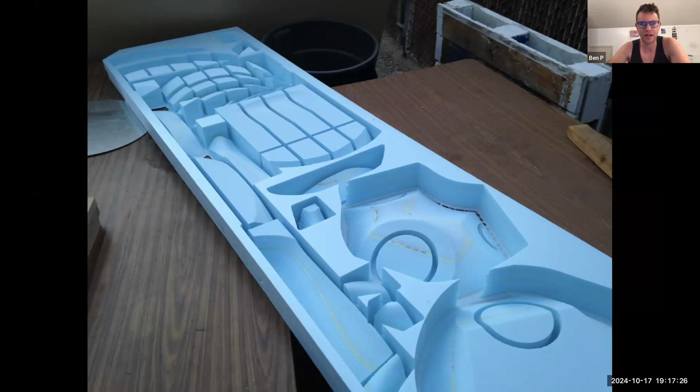So back to the second egg chair. I knew I wanted greater precision, elegance, etc. So I made the whole thing out of CNC milled foam. I didn't have a robot arm, and the final surface was very complex, so I sliced it into these 3-inch modules and had a waffle grid made out of wood. I put the little modules in the wood, then gallons of putty spackle on it. Then I put 2 layers of fiberglass on top and 1 layer on the bottom, and a tremendous amount of Bondo on it. The process still required an unbelievable amount of dumb labor.

But there was unquestionably greater precision involved here. So here we see the construction of the thing with this wooden core, and then this foam shell - well, now foam and fiberglass. And with the addition of these nodes, which were also CNC cut, the whole thing came together.

My thought with this lecture was that I would try and show photos of how I make things, so as to demystify the process. But then I want to encourage people who just graduated or are about to graduate to consider a more DIY approach to architecture.

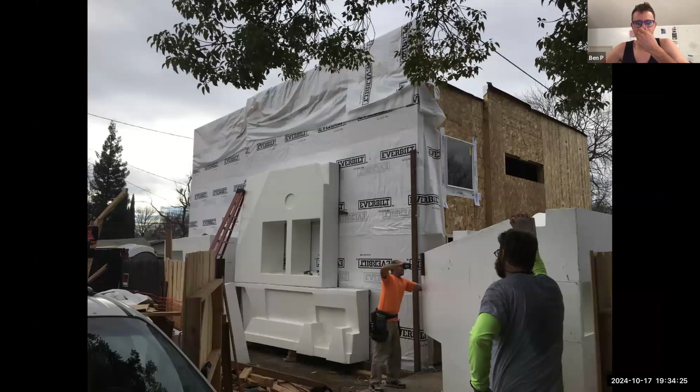Here's more or less a week of assembly. I had at this point sold my car, my truck, because I didn't need it anymore. So I took a train, and I slept in this house for a week, kind of bathing in the bathroom of a Starbucks, essentially - meaning brushing my teeth, then sleeping in a sleeping bag. It was winter, and California is very mild, but even winters can be pretty chilly at night. Anyways, I slept in this house for about a week while this was getting constructed.

All of these panels we were able to lift ourselves with ropes and proverbial manpower. But this panel and the one beside it needed to be lifted with an actual crane. The crane guy charged us something like $300 an hour, but he showed up, set up his crane, and craned these two in place in about 20 minutes. I don't remember if he prorated us for the hour, but he was in and out.

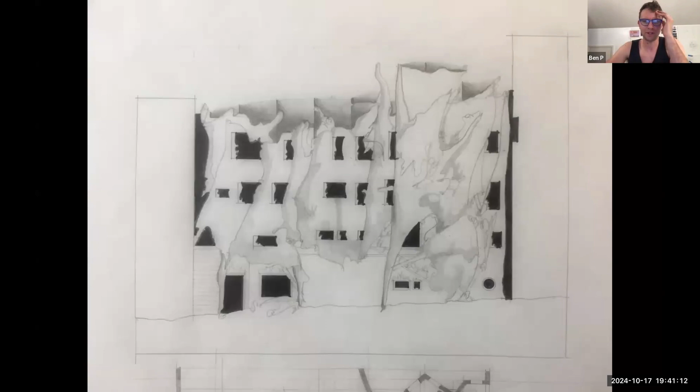I never built it, but I'm going to go through a few of the process images that I like. This is one of these earlier instances of a series of undulating volumes or bay windows lapped on top of each other. Why it looks like this, I couldn't exactly say—it looks like a series of bags.

I thought this was kind of a breakthrough. I couldn't exactly tell you why, but I just had a very wonderful, tingly feeling about it. I loved this gesture of an arch and then an inverted arch on top of it, and then this pinching gesture. Everything else was kind of fluff, but I loved this central gesture.

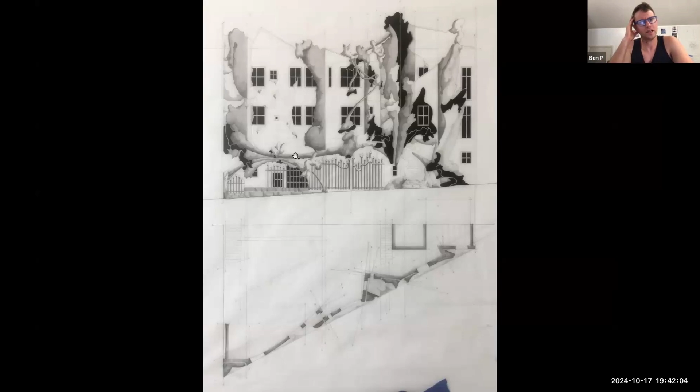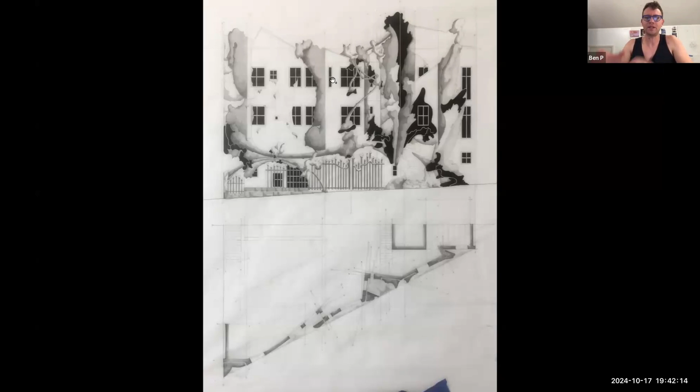So that blossomed into this drawing that you see here, which defines this idea I explained earlier about relatively simple projecting vertical masses, which are then adorned on the edges.

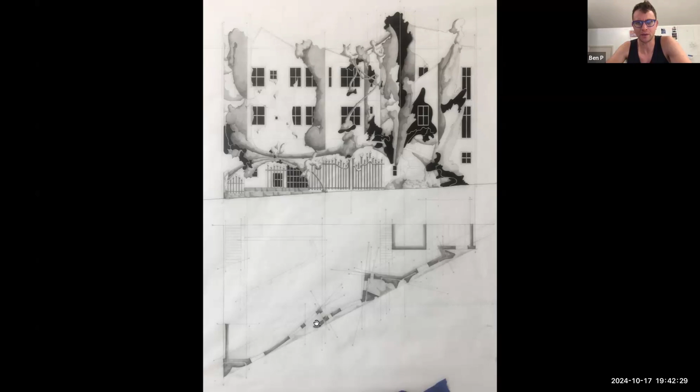Here you can see those projections with these tiny little sculptural appliques happening on the bottom. Here's that detail that I really like. This was a slightly more fine-grained version of that same drawing.

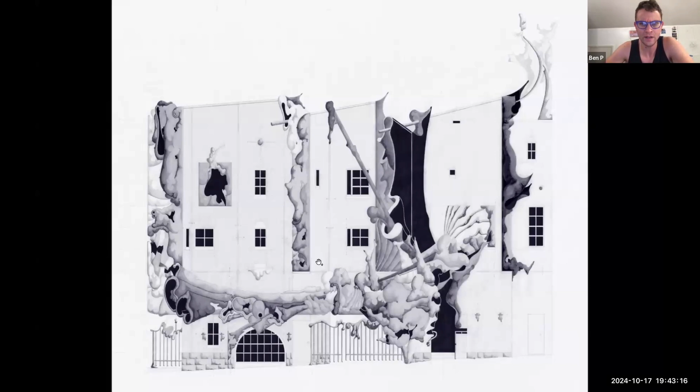But sometimes I get lost in the excess and virtuosity of a drawing, and you can very easily lose sight of the whole. By the way, what exactly is all this stuff? It's clearly eyes and mouths and orifices. Why exactly it is that way, I couldn't exactly say, but why is Gaudi the way that it is? I couldn't say either. So I figure if Gaudi could do it, I could do it as well.

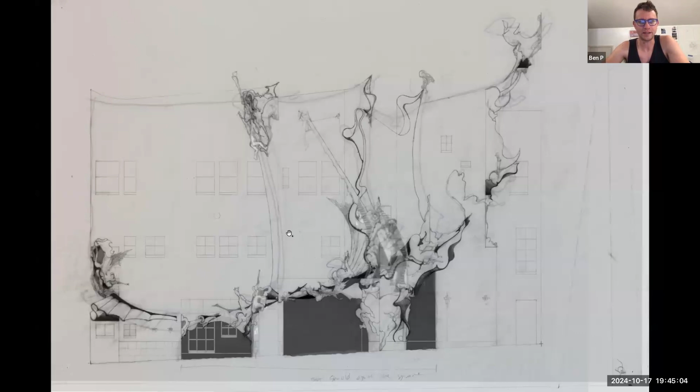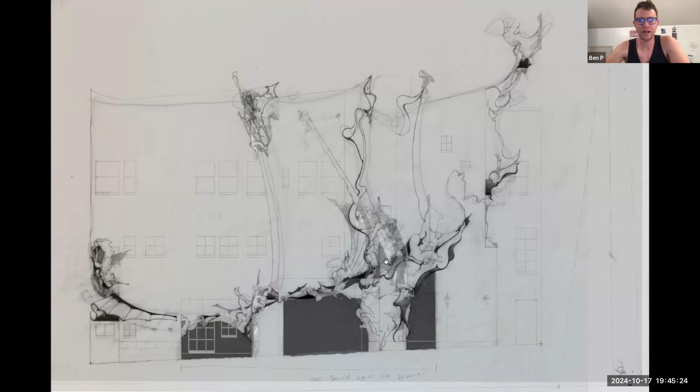Far less ornamental applique, far more purity in the overall parti, which could very simply be described as a curtain that's being lifted up and pulled away, although that certainly doesn't describe it in its entirety. I think it's important to have partis that are clear like that, but that you get down to the nuance of the thing and make it more than that.

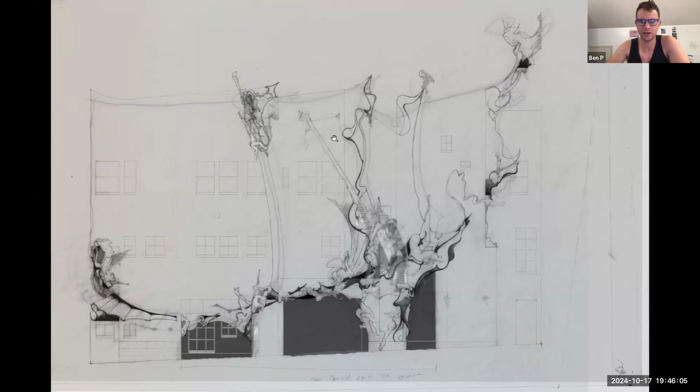There's also a play of scale happening as this tiny completed arch goes to this incompleted medium-sized arch, and then to this very large, totally incompleted arch. So the building is ascending in scale, literally across the facade from left to right. This is the computer translation of that drawing.

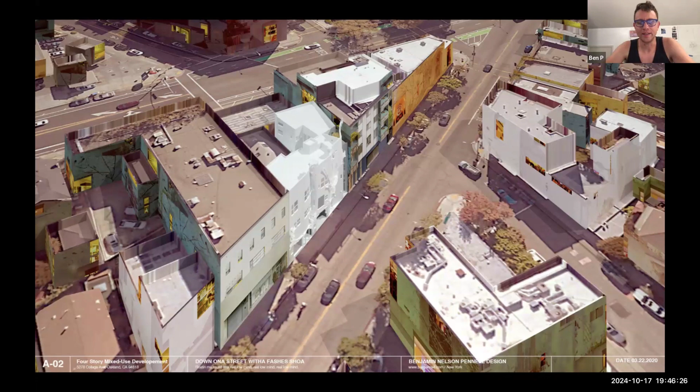And then this was the final outcome. I had a meeting with my dad and his business partner about this, and he said, 'Why do you want to do all this?' And I said, 'Because I want to be in a magazine or something. I want to do something that matters.' And that was the honest to God truth. That was all I could say about it. I wanted it to be in a magazine. And he thought it was completely idiotic what I proposed. And I don't exactly blame him because it's his money, and God only knows how complicated this would have been to build.

So it goes. This is the next project. It's a small shed. This was a tool shed that my dad asked me to build. And he said, I've got $1,500 for you, you can do what you like with it. And as long as you build it under a certain footprint, we won't need to get permits or anything like that. So he put in $1,500, and then I put in about $1,500 of my own money for the steel.

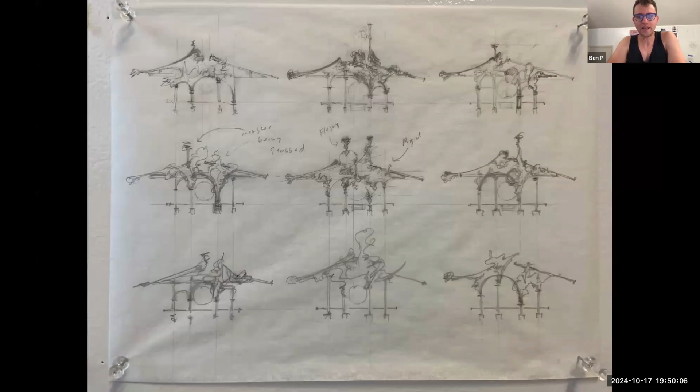Also, of course, Japanese temples. These are some origin drawings. The previous project had no real, let's say, ornamental basis, but this project, because it was a shed, like a tool shed, at a little cabin where we like to camp, and it's near a river, I was inspired by imagery of like fish and bats and birds and very naturalistic things. And so I imagined it somewhat like a Chinese temple with dragons, as a Chinese temple with bats and birds and fish and things like that.

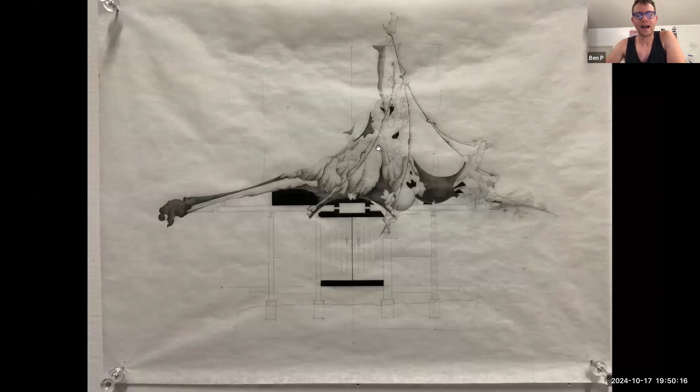So this was the kind of final version of what I had originally drawn. And I had really imagined this extremely ridiculous construction made out of probably fiberglass and steel and God knows what. And all of a sudden, it was time to build the thing, and I had to radically simplify my idea. But I think that this drawing was an important drawing for me. I think probably it led to other things, and I think probably distilled down in this very basic way, the presence of it is evident in the final thing.

nobody's, well, I don't know what's going to happen in your life. Maybe your life will be very different than mine. Probably it will, because everybody's life is different. But nobody has really asked me to do much of anything. Everything that I've done, which has been artistic, aesthetically meaningful, has been the result of my own passion and devotion to the thing, without money or profit kind of guiding me. I don't know. I want the thing. It's back to this materialistic drive that I have.

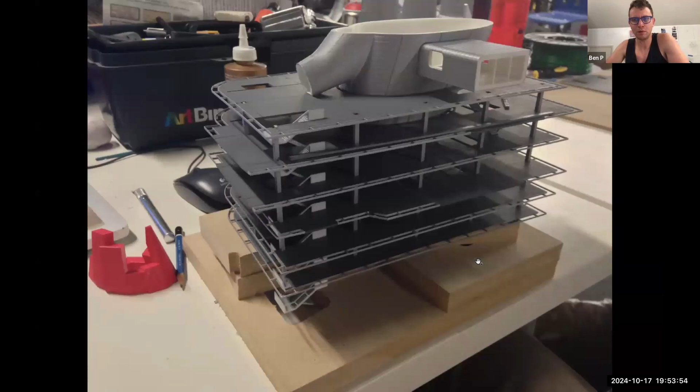This is not just simply a laser cut piece of paper. It's a laser cut piece of paper that was painted gray, and then it has a thinner piece of laser cut paper that was painted silver. And then it has a laser cut part that receives this plastic 3D print in the middle. Here you see a staircase going through, and even though this is very small pieces of paper, there's actually spray painted basswood structure and columns inserted through the whole thing.

I've been making quite literally miniature buildings all throughout school. And the translation or transition from student to practicing architect was almost seamless, because rather than simply laser cutting the thing out of paper at 1/32 inch scale, I laser cut the thing out of steel at full scale.

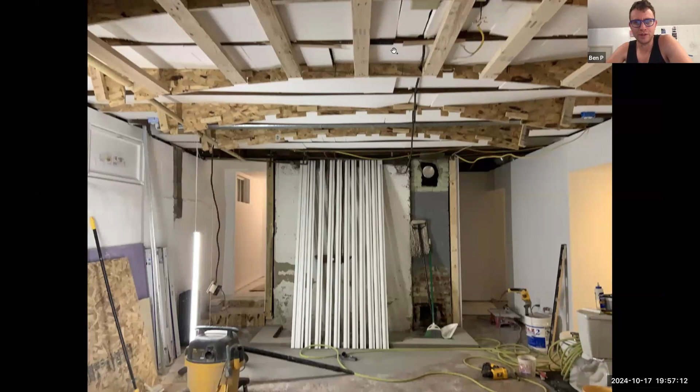So here we see this process of mine, which involves 3D modeling and pencil sketching back and forth. Here's an image of the barrel vaulted ceiling, which is very straightforward - OSB CNC cut and then 2x4s. And then here you can see how we made the edge.

This is a small piece of steel, which was welded in a waffle-like fashion to create this component. And then there's a final layer of mud, which kind of unifies the whole. So here we see the vaulted ceiling and then the steel piece.

Here we see more of the vaulted ceiling, which has plumbing and electrical and things like that, and then more of the steel piece. Here we see various components coming into play.

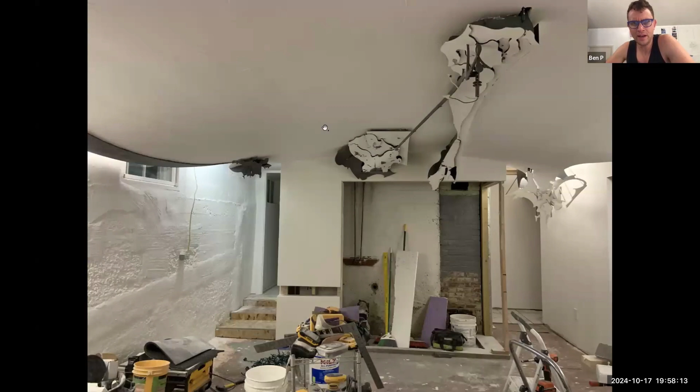The ceiling is almost done here with this 1/4-inch drywall, this kind of floating angel in the back, and then this arm. Now the head and the ceiling has this texture, which is then blended into the steel so that the gap between the steel and the sheetrock goes away.

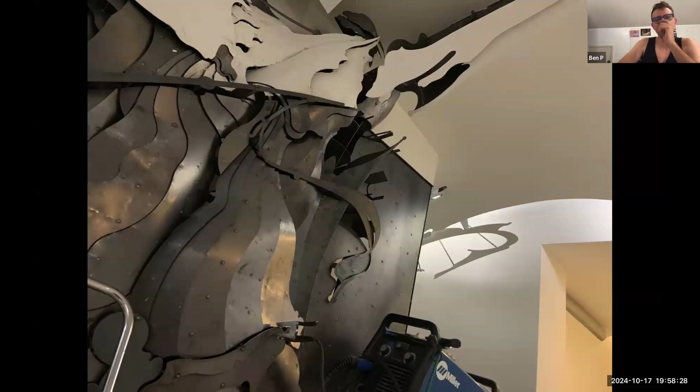And then here is the nearly completed thing. Here is a zoomed in view of it under construction. I really like it - it's a 3-dimensionalized version of an Aubrey Beardsley drawing.

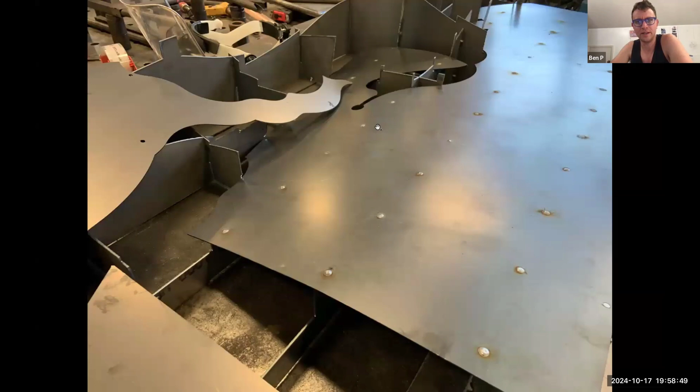Here's the sheetrock and the steel being joined together. Here's a close-up picture of the waffle grid and this fireplace centerpiece. These tabs were laser cut, and then this is called a plug weld when you weld something from the front, and so it was all plug welded.

This made it very easy to assemble because I was able to stand on it with my body weight to contort it to the shape and then just plug weld it from the front. And then the plug weld became part of the ornamentation of the thing.

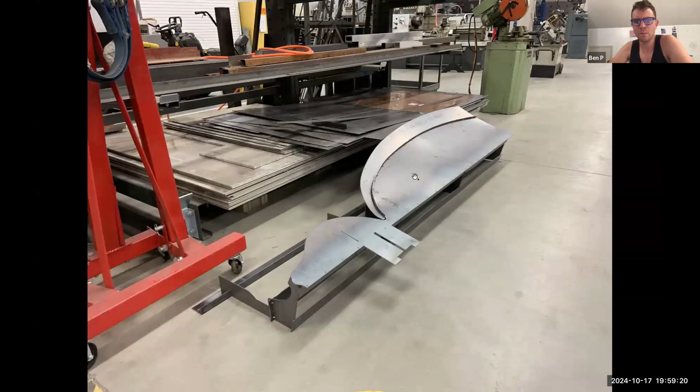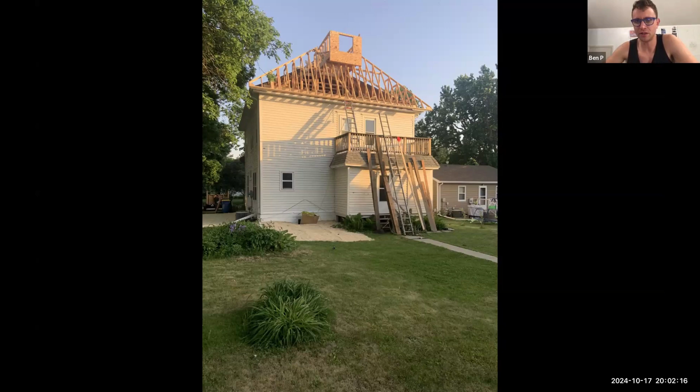This dormer has been kind of released from its subordinate position, midway on the roof, and is now taking the climax of the roof. Frank Lloyd Wright always said, I don't want to build on top of a hill, I want to build in the middle of a hill. This is saying, I want to build on top of the hill.

So that's that. I have some pictures of the house that I've most recently been working on, of the exterior, which I quite like. But I do not yet have photos of the interior that I like all that much. Nevertheless, I will share some process pictures of the interior and some more or less finished pictures of the exterior.

This is a house in Christiansburg. I did this last house as a renovation and then sold it. This was a house I actually lived in, so it's technically a flip, and I made a little bit of profit on it. So when I started the next house, I was once again just brimming with confidence.

I thought I would build it in a year, for $300,000, and I'd sell it for $400,000. I'd make a ton of money and everybody would love it, all this and that. It turns out it took 3 years to build, it cost $500,000, and sadly, ladies and gentlemen, nobody wanted to buy it.

This turns out to be not the worst thing in the world, because my family and I are going to move into it, at least for some unknown period of time. But anyways, the house looks like this. It's quite cool—I'm kind of thinking I probably should have just talked about this house, but so it goes.

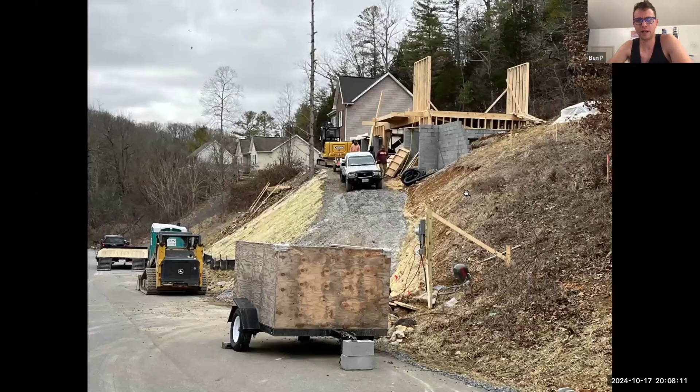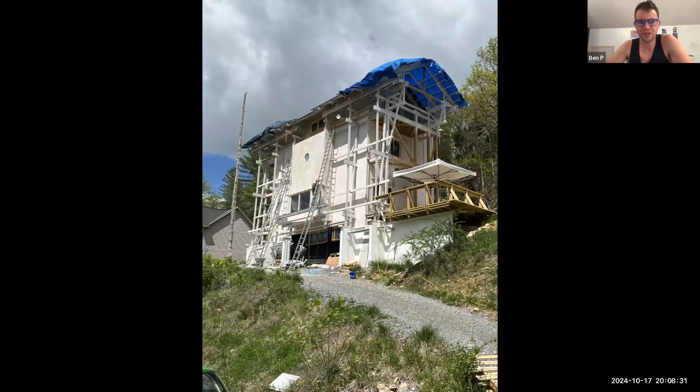So here's some construction photos. Here's this white plywood stain, and more of it. Here's this roof construction with these large eaves. Here's this exoskeleton with this facade, like the Giacomo della Porta example, which is stretched to make the frontal appearance of the house about 50% larger than it actually should be. These are eventually infilled with panels. Here's a zoomed-in picture of the truss work, and more of that. Here is Washington's little dome from Mount Vernon, albeit more World War II-like and a little smaller. This is, however, big enough to climb through.

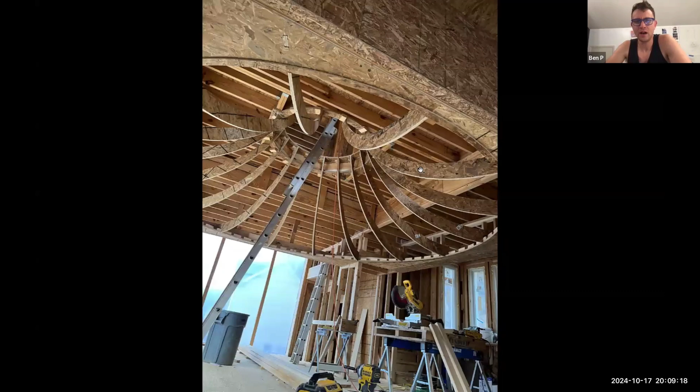This is the inside. We're going to take a tour of the inside. This is a central dome in the middle of the house. There's a lot about the house which is expanding left and right. You may have noticed the gesture of the roofs, which kind of pile on top of each other, one on top of the other. So there's this east-west expansion, but then there's also this up-and-down vertical ascension, because the whole house is connected with this three-story semi-dome structure. So here's the entryway, and here's the dome.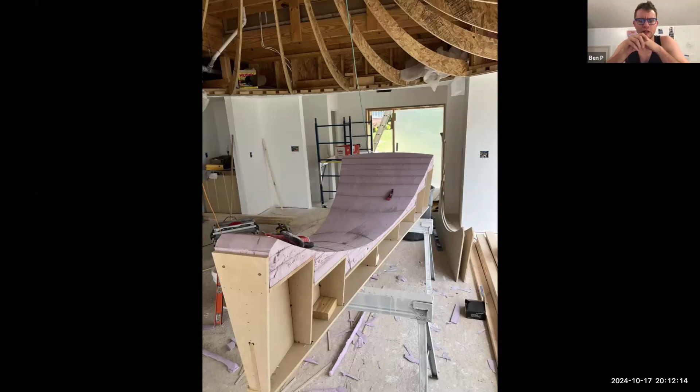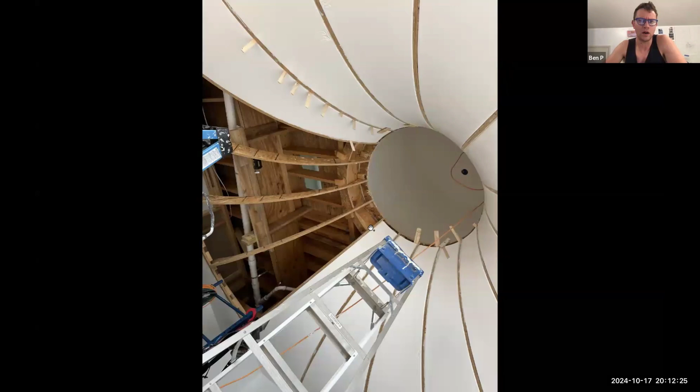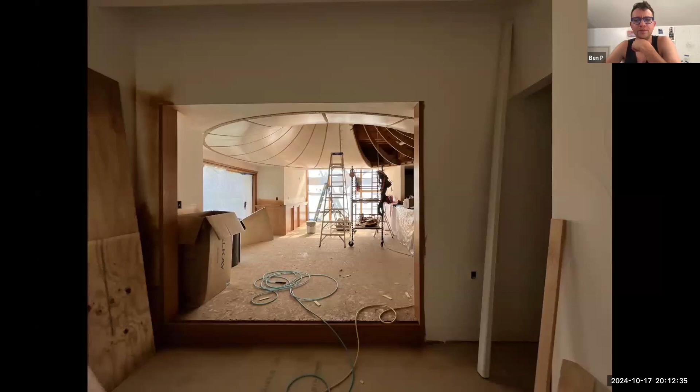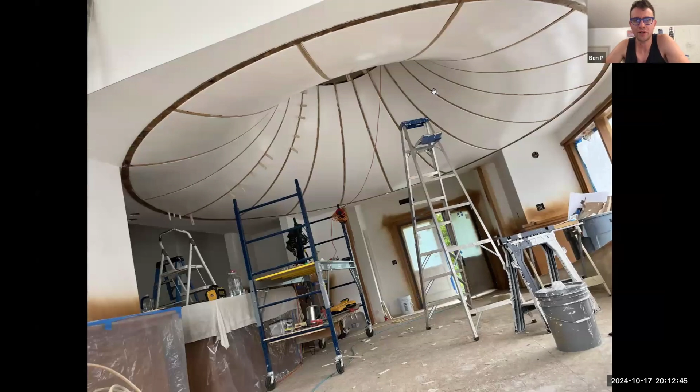I wanted to now focus a little bit on the construction of the dome. Here is the mold, and here are a series of leaves which compose the overall thing. Here's a zoomed-in detail of that. This is a picture of the terminus of the dome. This is all double curvature here, so it could only be made out of fiberglass. However, as we'll see in a minute, the dome terminates with this steel construction, which is all single curvature. So it's basically a continuation of technical experiments I'd made with the basement project, but now no longer in a barrel vault, but in this kind of three-dimensional dome setting.

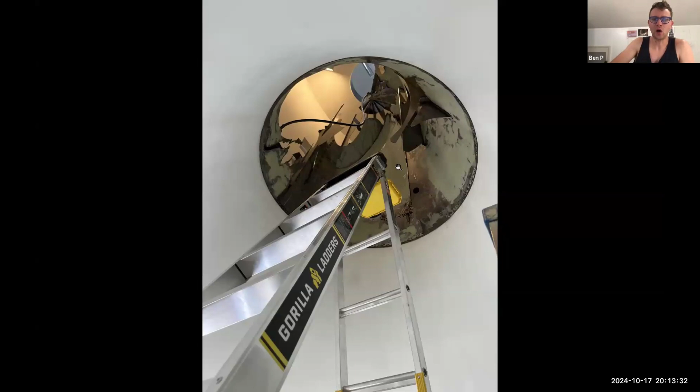So here we see the dome and then these steel add-ons, which are creating this decorative terminus. Here we see all of the steel add-ons together.

This is from the master bedroom peering down into this engine space. It's kind of like an engine transmission, the heart of the house. This is the dome still being surfaced and painted and things like that.

This is my now building partner, Mitch Minford, who was instrumental. This was also, for the record, built by Mitch Minford, myself, and about 20 Virginia Tech students, most of which are on this call: Seth, Mitchell, Signey, Joe, Alonzo, Ian.

This has been a massive effort. Students working on this project had a somewhat atypical summer internship where instead of building models, they were staining wood, making crazy sculptural things.

This is another photo of the dome in its nearly completed state, which I think of as a modern version of a chandelier. This is what it looks like at night with only one light on and this very strange pattern that's cast on the floor. And then this is a photo looking up the dome now.

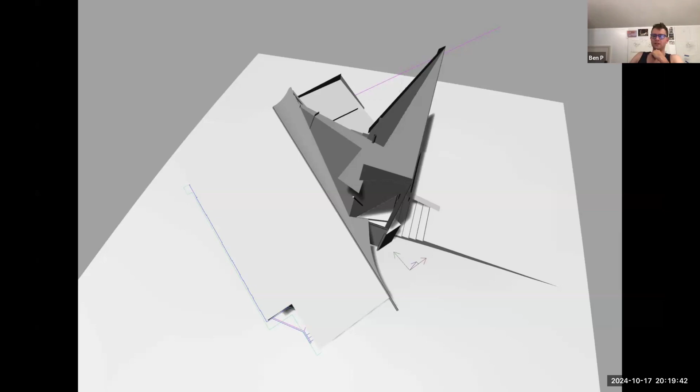So, yeah, I'm just reading Frank Lloyd Wright's autobiography right now. It's an amazing work, by the way. Frank Lloyd Wright is not only an architect, but he's very literary, a wonderful writer. And everyone criticizes Wright for this insane egotistical self-confidence. But I think the field, short of some kind of miraculous intervention or genuinely collaborative effort which is the product of 5 or 6 people working together, short of that kind of thing, it really requires that. Otherwise, you kind of lose steam after a little while.

But good question. I have a question.

Yes. Well, I feel like one of the things that always stood out to me with you, Ben, is your taste in things, the things that you like and the things that you dislike. And I was wondering if you could put to words how you encompass that, or other architecture precedents and other things?

I don't know. The architecture that I like is very, very traditional. I worship the basic canon of architecture. I think Rem Koolhaas is a Christ-like figure among us mere mortals. The same for Gehry, the same for Le Corbusier, the same for all of the architectural greats.

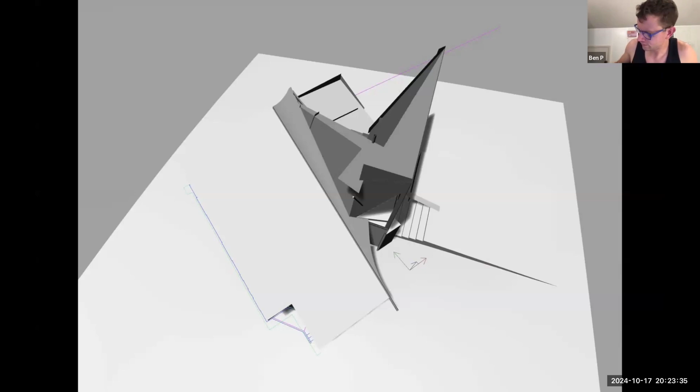Hey Ben, I have a question - I missed the first half, I was commuting home from my job. If this is a stupid question, you don't have to answer it. I'm currently doing the Amber Book stuff, studying for the exam, and I'm curious how you reconcile the technical aspects of architecture and the practice itself with the more sculptural and figurative aspects of it. Do you ever find yourself having to take or sacrifice one or the other, and how do you look at that?

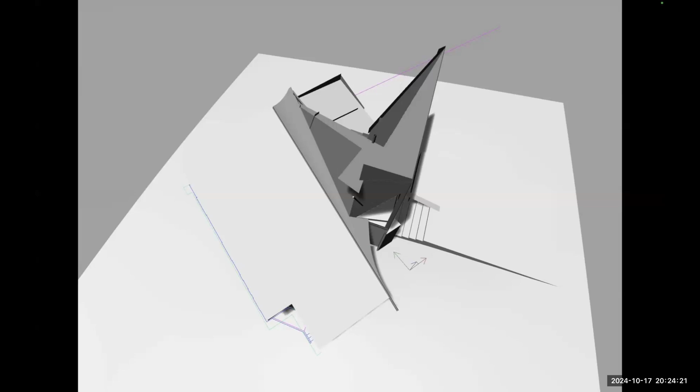No, I've never felt like I couldn't build something - even that ridiculous facade that had all the curves on it and the naked woman. I really did have a plan about how I was going to do that. I think it boils down to the models that I made in school.

I think some students are overly ambitious about models - they plan to make a model that they just can't make well. I never made a model that was so complicated it couldn't be made well. When I was a second year, all the models I made were boxes. When I was a third year, they were slightly more than boxes. In my fourth year it just kind of progressed, and I feel like I never took on something that couldn't be executed with care.

I don't really feel like my projects are value engineered - well, I guess with the exception of... I don't know. I can't really imagine a more expensive version of the Christiansburg house, or the project I'm working on right now, or this thing you're looking at now. I don't really care about some nebulous, non-existent, more expensive version of it. I only care about what I can build. This isn't helpful, what I'm saying - I'm sorry, but I'm just honestly thinking about it and describing my experience.

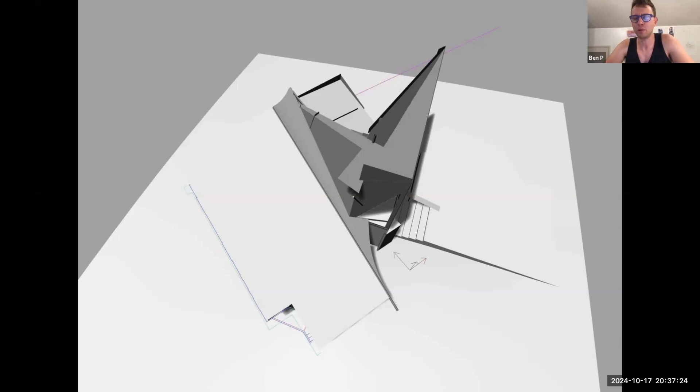These people are making imitation Porsches—getting steel, getting tires, getting their mother to sew the leather seats, making steering wheels out of whatever. You can find this on YouTube, or you can see DIYers who make their own Ferrari. It's an ugly Ferrari, not perfect, but it's theirs. I don't think they're doing it for applause on YouTube—I think they genuinely want to have a Ferrari, and they can't afford one, but they just want the thing.

I can't exactly explain why, because I'm not particularly obsessed with living in these houses, although it just so happens I am going to live in the one we just talked about. But I just want to be inside of it, I want to know what it's like. I want to know what it's like to be Rem Koolhaas or Le Corbusier, to walk around an incomplete building that you've designed. I'm not willing to wait for somebody to give that to me.

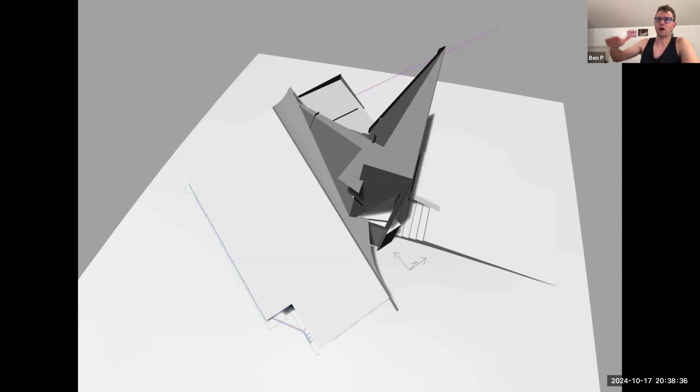To your question more specifically—I saw Elon Musk's Tesla truck and I was just like, that's it. All other cars just look like a joke. You've seen a whole bunch of cars lately that look kind of like a Tesla truck—not exact imitations, but I think that look has had a big influence. It's just like the car of the future. I want a Tesla truck, I want the house of the future, I want a Tesla house.

I just want it. The shed project and the project in Christiansburg, as you pointed out, look very antique, kind of like 19th century projects, with a little bit of ornamental applique here and there that looks kind of high tech. In this case, I wanted something streamlined. I want it to look modern, I want it to look brand new, I want it to look from the future.

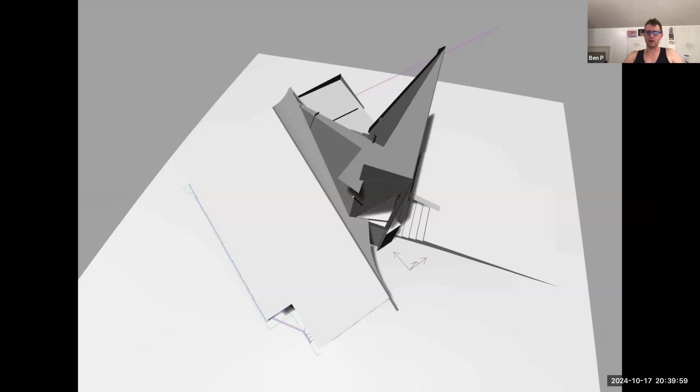I was kind of sick of drawing temple-like projects with pitched roofs, and I wanted to have a Le Corbusier project of my own, or a Daniel Libeskind project of my own. I can't afford to hire Daniel Libeskind, and I don't have a client like Daniel Libeskind would have, so I just kind of take it upon myself to do it. It just kind of feels right.

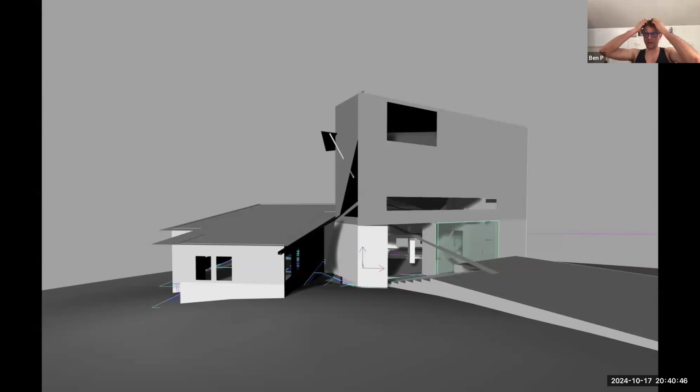I am terrified what the next project will look like, because I feel like I have no ideas—I literally have no idea what I'll do after this. Fortunately, I'm not too worried, because I think this project is probably going to take 5 years. The last project took 3 years; this one's twice the size, and it's big and kind of complicated. So I've got 5 years to figure out what I'm going to do next.

Stanley Kubrick made something like 9 or 10 movies. You don't have to have too many ideas—I think it's just about having an idea that's pretty good. It might not be monumental, but pretty good, and just seeing it through to its conclusion.

I have a couple questions. Yeah.

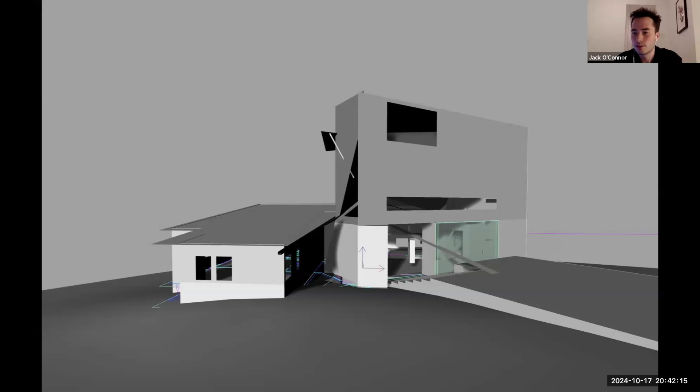As these projects get bigger, you've had such control over the craft of the project and constructing it—you're literally building the house. But as the dreams or projects get bigger and badder, how do you imagine yourself in that construction process, and how do you imagine carrying such a level of complex geometries when you begin having more people in that process? And then, how do you talk about these ideas in layman's terms to your client or your boss, or anyone outside of the world of architecture?

A lot of people like Frank Gehry's architecture because of very simple words—it's fun, it's exciting, it's silly. There is such a thing as art house film, like Andy Warhol art house film, and general people don't like art house film. I don't like art house films—I like blockbuster movies. I like National Treasure and Pirates of the Caribbean.

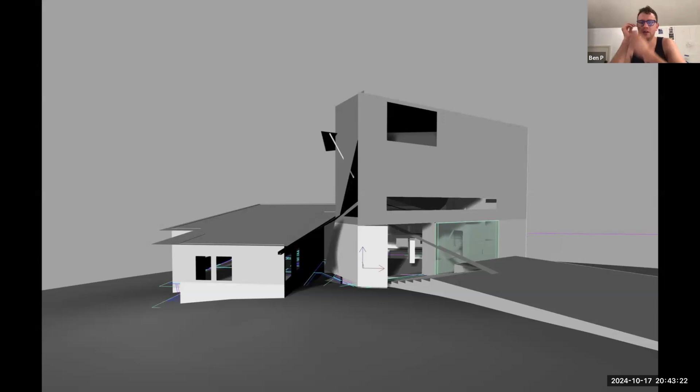I've been using the religious metaphor a lot, church architecture, to describe the most recent house, and everybody gets that. If you have very conservative tastes, you probably like church architecture, so you might get that analogy.

But I have tried to deliver... I don't try to do anything. I do what I want to do, and then it is the way that it is. But I think the projects deliver a certain base level, or maybe slightly beyond base level, of comfort, daylight, and warmth in materials. And then whatever aspect of it that's avant-garde is stomachable, like a pill.

So yeah, I don't really worry too much about talking about or explaining the stuff, because I don't have any clients. I would love to have clients. And I think just talking to them in the simplest way possible.

The White House, I did kind of give them a lesson in architectural history. I explained Michelangelo's Porta Pia, Le Corbusier, and Robert Venturi, and I treated them like intelligent people who could make sense of what I was saying, though they didn't know anything about the history of architecture. I think you have to give people credit, basically.

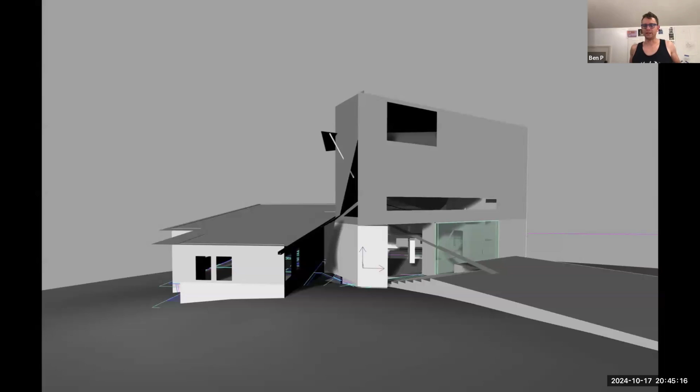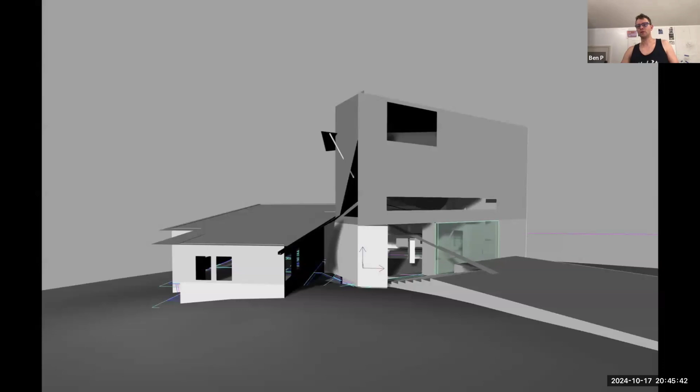If people write you off and say, 'Oh, you're a total idiot, this architecture is stupid,' then those people are hard to reach. I don't know how you reach people who are going to make a snap judgment and just move on. But I think most people have a couple of minutes to hear why you did something, and most people actually have an open mind.

If your thing is of a certain quality—again, just basic craftsmanship—is it straight? Is it well painted? Are the lines crooked, or are they not? These basic things people recognize.

Then your other question about the future—I pray to God that I have the problem that you described. I pray that I have to worry about that. My biggest fear is not how I'm going to solve that problem. My biggest fear is that I won't have that problem.

I think my favorite analogy for architecture is filmmaking, or in particular Stanley Kubrick. Stanley Kubrick spent like 1 to 2 years writing a script, researching the subject. I'm guessing a certain amount of time preparing, casting actors, and then a certain amount of time shooting the thing, maybe 1 to 3 years, and then a certain amount of time editing.

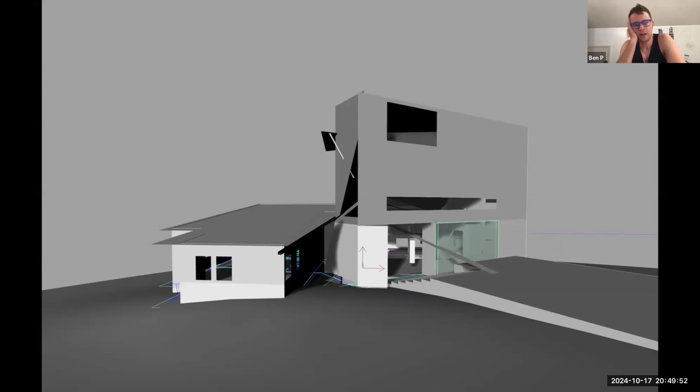Anyways, if I were to ever be involved in some kind of commercial scale work, inevitably it's going to require a relatively straightforward client-like investor who wants me to build. Again, that's beyond my control, so I try not to really worry about it or think about it. Not that there's much to think about anyways.

It's cliched advice, but just do what's directly in front of you. You're making a model at work—make it the best model you've ever seen in your life. You're making a drawing or painting at home—make it the best drawing or painting you've ever seen in your life. And then, whether somebody commissions you or you have this windfall of money, that's kind of up to something other than yourself.

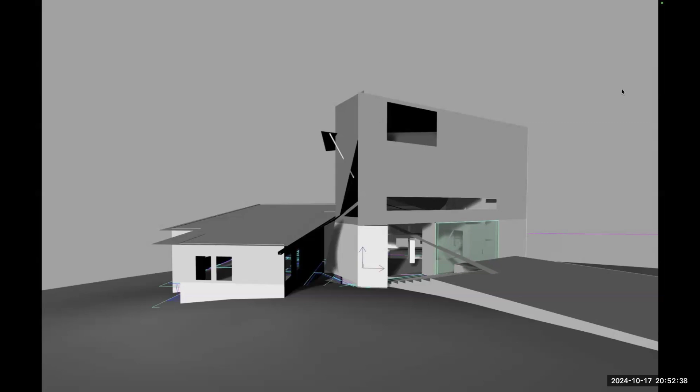You have your beautiful drawings, and then you also model, but it seems like primarily what you're interested in is just pure building. Like Zaha, who was primarily interested in painting, and then later gets a commission and her paintings turn into architecture - whereas with you it seems you're purely interested in having something physically built. So what value do your drawings hold, and how does this equation play out? In the grand scheme of things, how do they dictate what the architecture looks like?

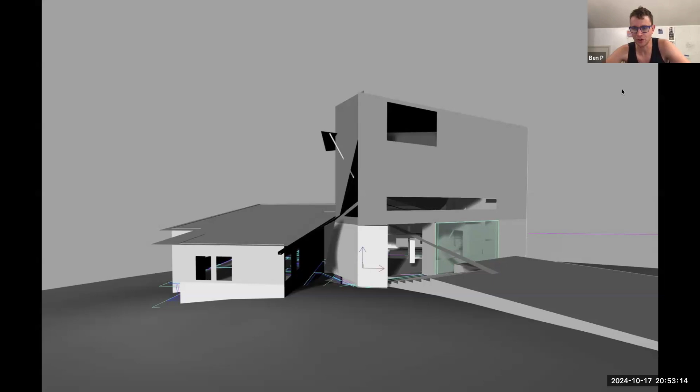Well, it comes down to simply wanting it. When I made a lot of pretty drawings, I just desperately wanted the drawing. I wanted to look at it, I wanted to make it, I wanted to eat it - I wanted the drawing, I wanted the object. I just wanted it. So this desire to have this drawing, an ornament to my life, made me make drawings a certain way.

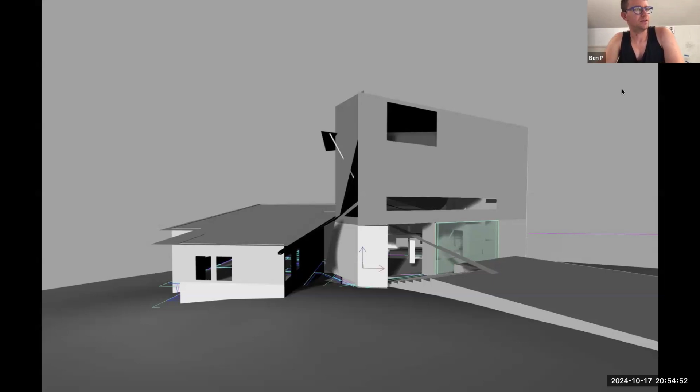Same with the models - the Rhino model that would make the physical model, the paper model, the acrylic model, or the 3D printed model. I didn't really care about the Rhino model because the final product was the physical model. In my last year or so of graduate school, I stopped caring about making renderings - actually pretty much all of graduate school, because they just weren't interesting to me. They had no value. I don't know if models have value to anybody else, but they have value to me. If somebody broke into my house and smashed my models, I'd be super sad, I might cry. If somebody found some rendering JPEGs and deleted them, I don't think it would be a super big loss.

I've always had an end product in mind. I wanted to make this point - I don't really like the term experimentation. I've never thought of myself as just kind of messing around. That's partially why I enjoy teaching so much, because I feel like I'm bearing witness to a lot of people experimenting with things and trying new things that I'm too afraid to try myself. I proceed very, very cautiously with every kind of thing I do because I'm terrified of failing or not finishing. So yeah, that was about the idea of experimentation.

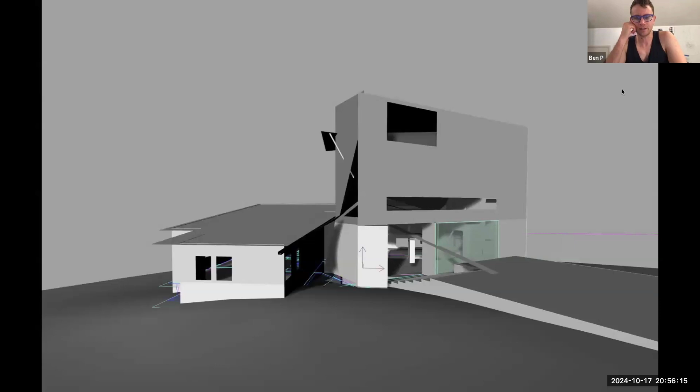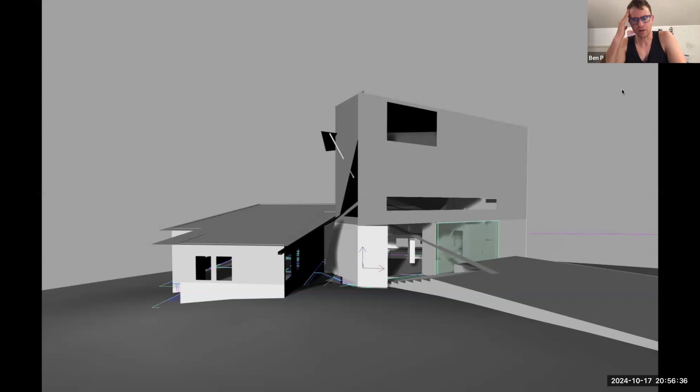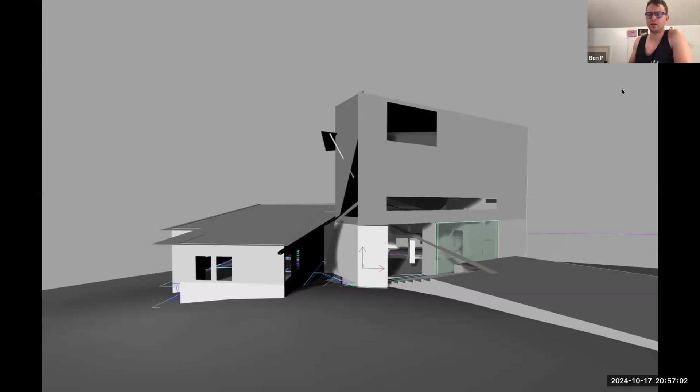But again, to your point, I don't really care about process. The Beatles' process, Jimi Hendrix demo tapes, Beatles demo tapes - they're vaguely interesting, mainly as historical artifacts. But the cultural value, the irreplaceable thing, is the final song itself. It's not the demo tape of Sergeant Pepper, it's the final version of Sergeant Pepper - if that were magically deleted from human history, it would be an unbelievable loss. In comparison, the little lyrics, demo tapes, or little ditties here and there just pale in comparison, times ten or whatever.